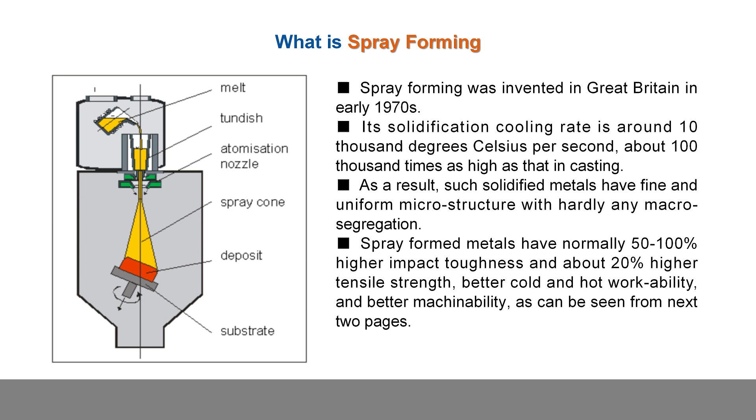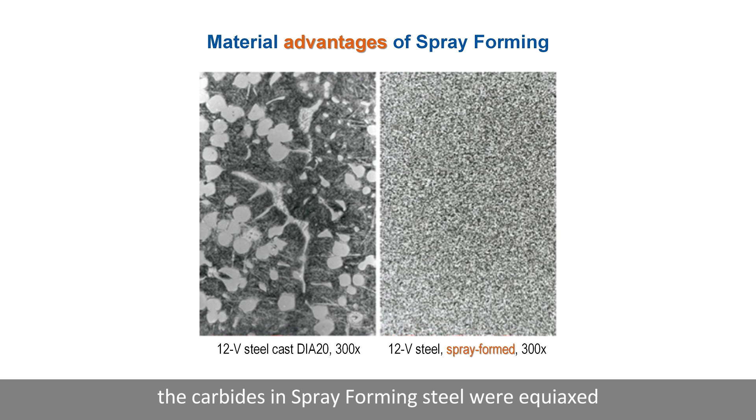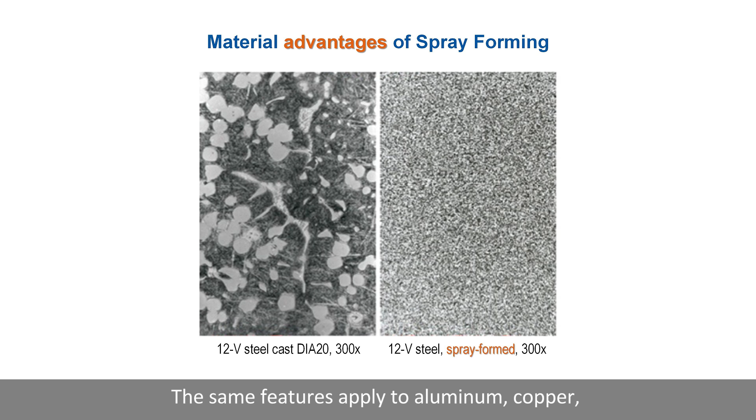As seen in the microstructure comparison, the carbides in spray-formed steel were equiaxed, about 5 micrometers, due to ultra-high-speed solidification. The same features apply to aluminum, copper, superalloys, and other alloys.

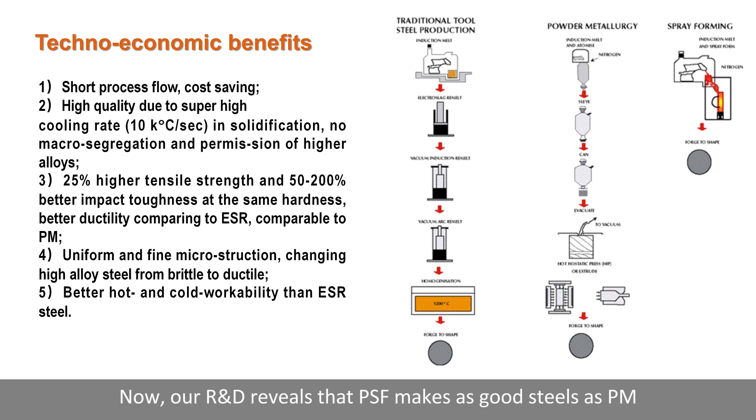This picture compares spray forming with traditional steelmaking methods—VIM, ESR, VAR—and PM, powder metallurgy, for high-performance steels. It used to be recognized that the PM process should make the best high-alloyed steel. Now, our R&D reveals that PSF makes steels as good as PM, but with a much shorter process flow and much better techno-economic benefits, while being pollution-free and energy-saving.

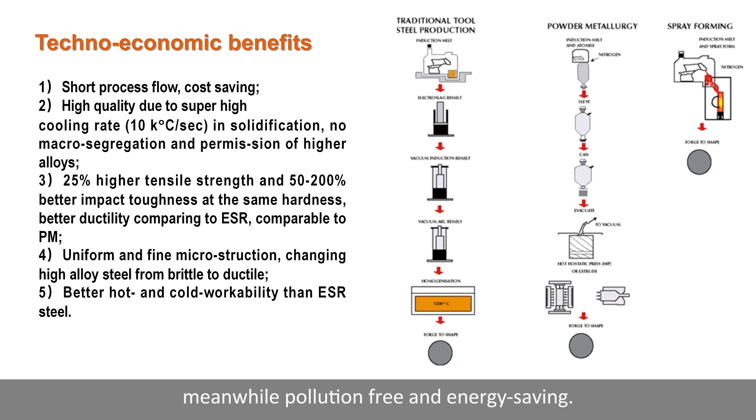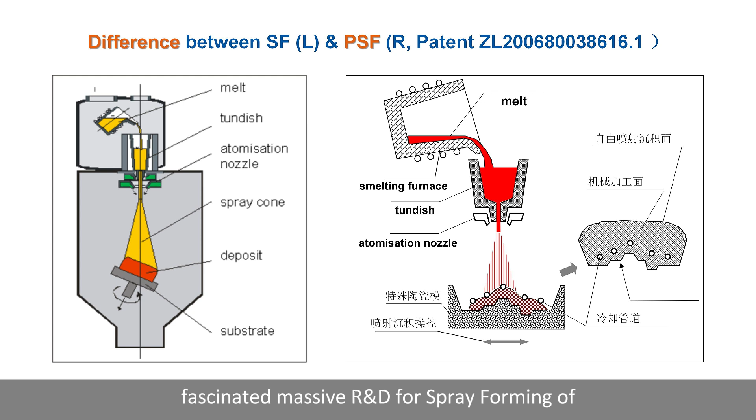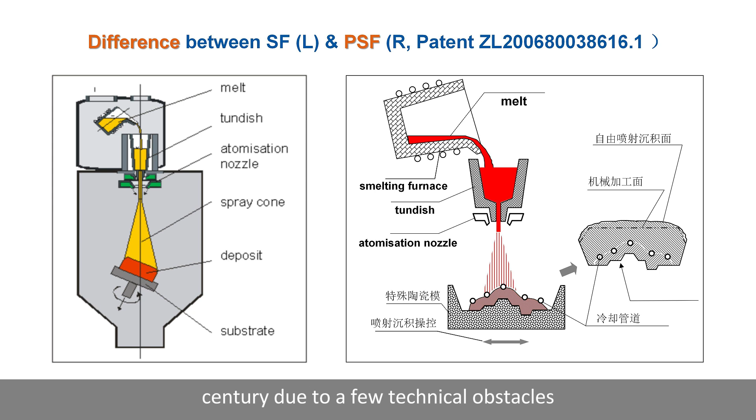Such microstructure and property advantages fascinated massive R&D for spray forming of near-net shape PSF for nearly 30 years. However, such efforts were interrupted at the end of the last century due to a few technical obstacles, such as atomization method and substrate materials. Through an R&D project from 2000 to 2003, a Chinese scientist resolved those obstacles and established the Precision Spray Forming (PSF) process.

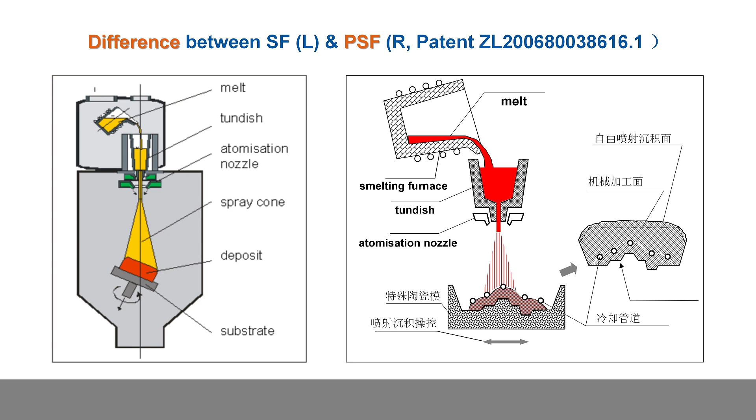The inventor of PSF technology is Yang Yunfeng, who received his metallurgy Ph.D. from Tsinghua University at the end of 1985. During his 50-year career, he worked as an engineer in the workshop, a university professor, chief research scientist in R&D institutes, and managing director in manufacturing companies.

He won China Natural Science Foundation's Youth Fund in 1988 and several national awards in R&D, for instance, Award of Innovation Finland 2009, and First Prize for Technology Progress in China's Automotive Industry. Recently, he won the Best Technical Paper Award at the 75th 2024 World Foundry Congress.

PSF technology enriched metallurgy theories and practices. Under his leadership, for the last 10 years, Fenghe has developed numerous high-end metallic materials, ferrous and non-ferrous, with advanced cost performance.

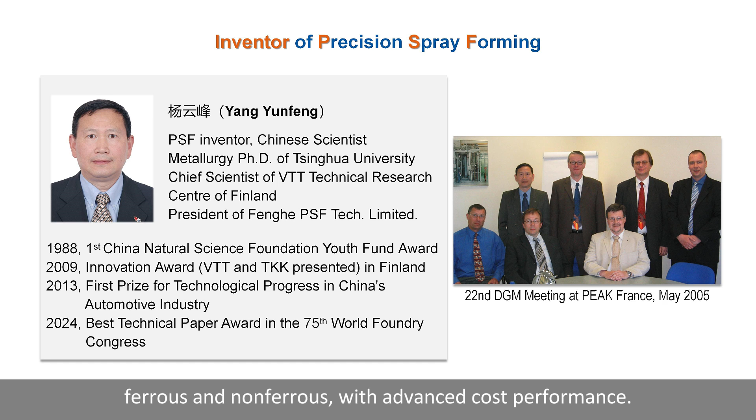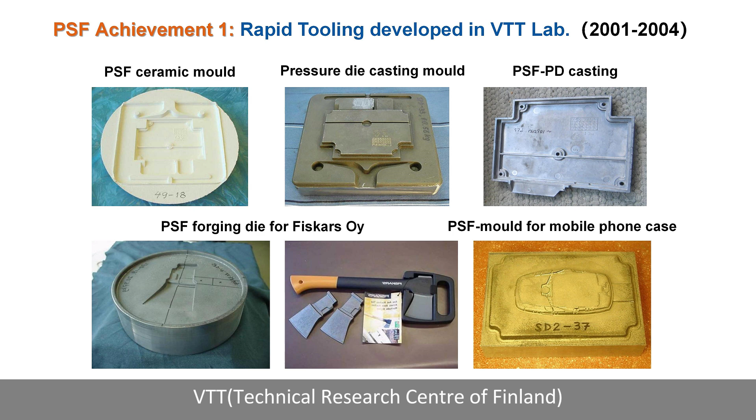At the early R&D stage of PSF in VTT, Technical Research Center of Finland, near-net shape tools included die casting molds and forging dies, etc. The PSF forging die shown in the bottom left corner had spontaneous improvement in lifetime, cost, and lead time.

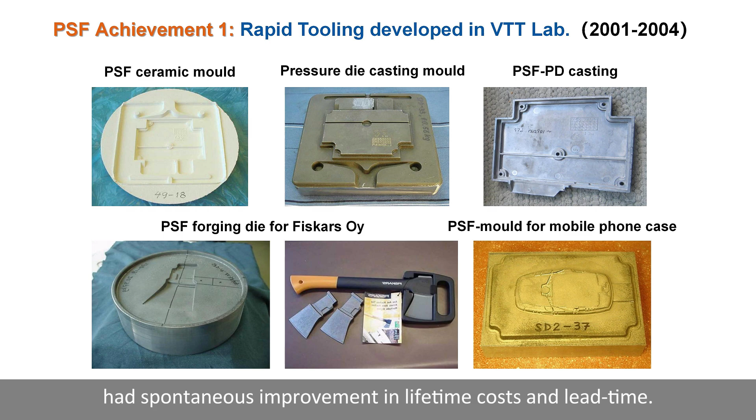Key persons from the company Osprey, the inventor of spray forming from Britain, came to VTT, Technical Research Center of Finland, to study, and were left only with surprise as to how such difficult technical obstacles were overcome.

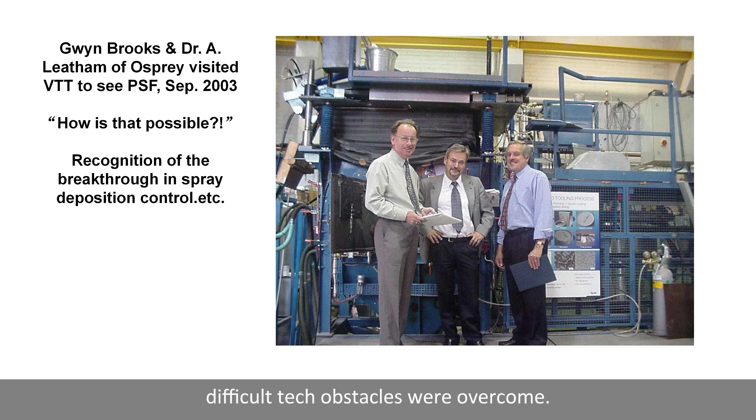Because of systematic optimization, PSF is more stable in producing special steels, especially high-alloyed steels, such as cold work steel and high-speed steel. Several PSF steel plants were built up in China, capable of making 6-ton steel ingots, which is the biggest in the world.

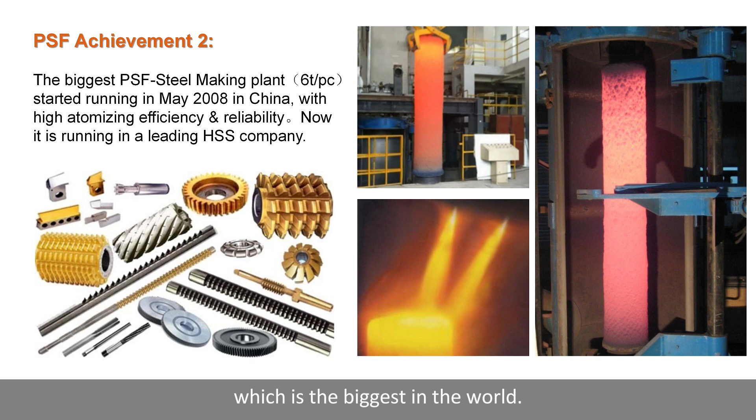Hot work steel is another tool steel used for tooling of hot forging, extrusion, and die casting, etc. Double, even quintuple lifetime was reported from our customers.

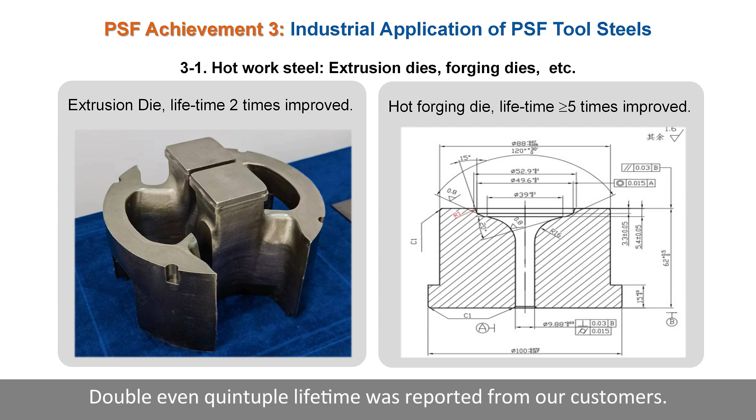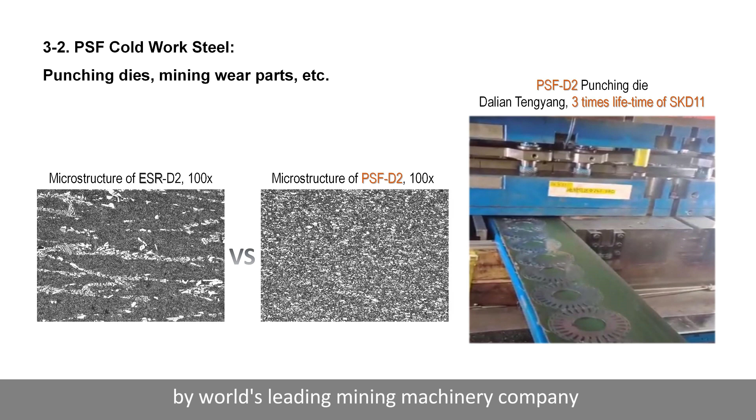PSF cold work steel has been used for wear parts by the world's leading mining machinery company for more than a decade. Another example is the punching die shown in the pictures.

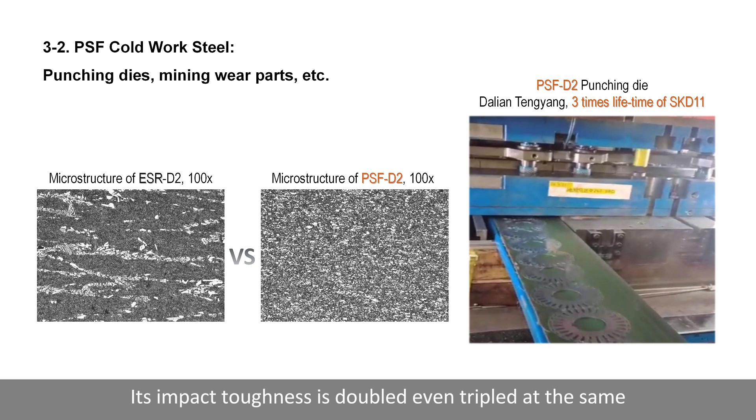PSF D2 has much better microstructure than that of ESR D2. Its impact toughness is doubled, even tripled, at the same hardness, HRC 60. Lifetime is about 3 times improved.

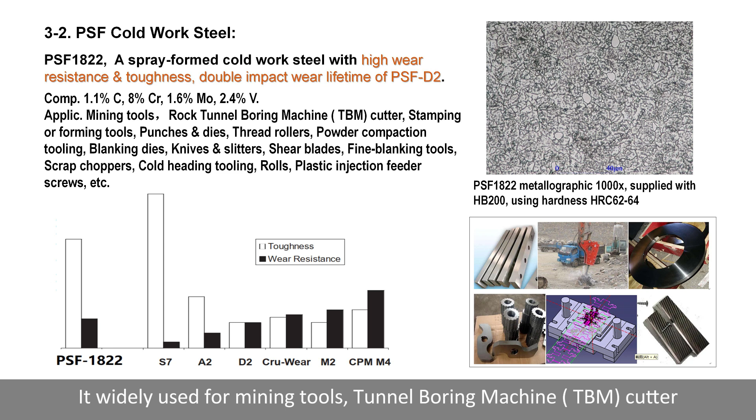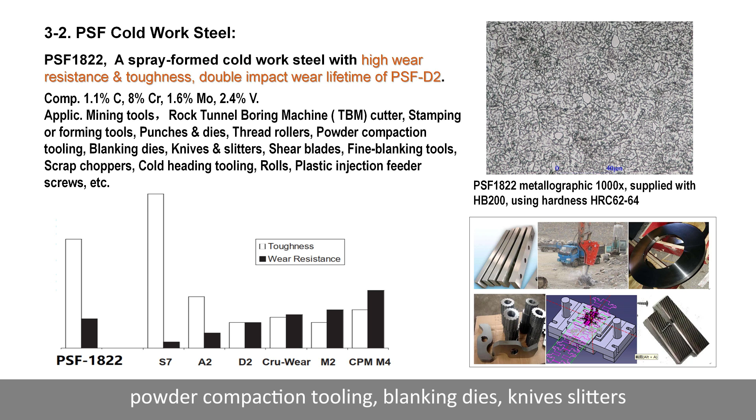PSF 1822 is a best-selling cold work steel due to its combination of high impact strength and wear resistance. It is widely used for mining tools, tunnel boring machine (TBM) cutters, stamping or forming tools, punches and dies, thread rollers, powder compaction tooling, blanking dies, knives and slitters, shear blades, fine blanking tools, scrap choppers, cold heading tooling, rolls, and plastic injection feeder screws, etc. Lifetime is improved by 2 to 5 times.

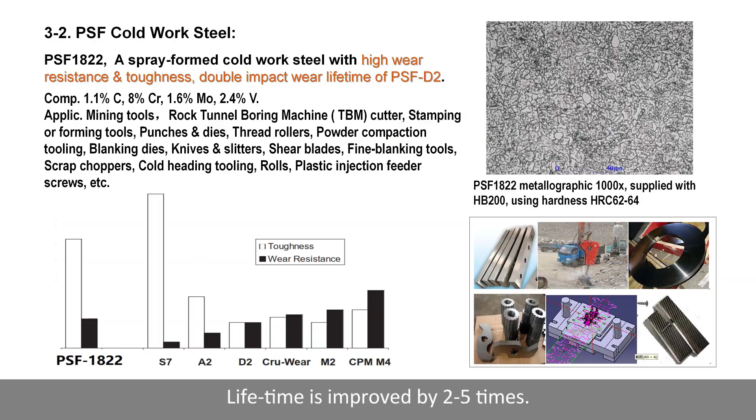As a result of the fine structures, high-speed steel, such as PSF M2, increases impact strength by 100 to 150% at the same hardness, HRC 66. Cutting tool lifetime of PSF M2 increased by 2 or 3 times over ESR M2.

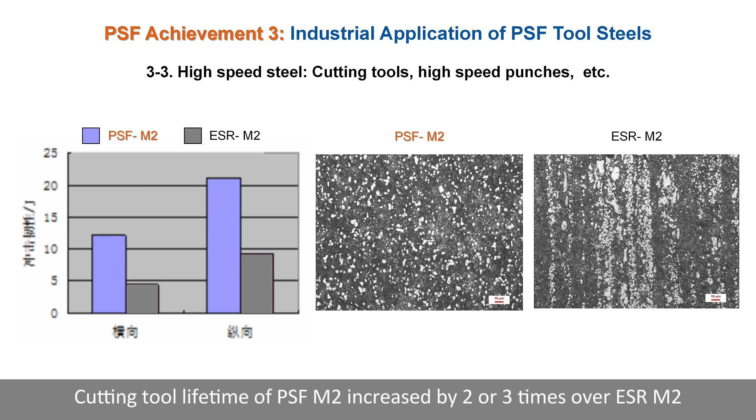Some high-speed steel applications are shown here. The lifetime of PSF M2 broaches increases to 5 times compared to ESR M2. A PSF-M3 injection rod's lifetime increased by 30% compared to PM-M3.

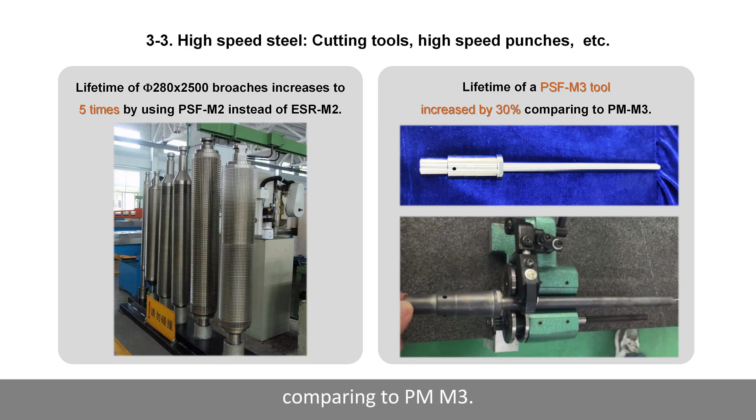These pictures make a comparison of PSF high-speed steel with PM high-speed steel. Though the difference is barely distinguishable, other structural and performance advantages are still present. Wear-resistant lifetime of PSF steel is increased by 40% over its PM counterpart.

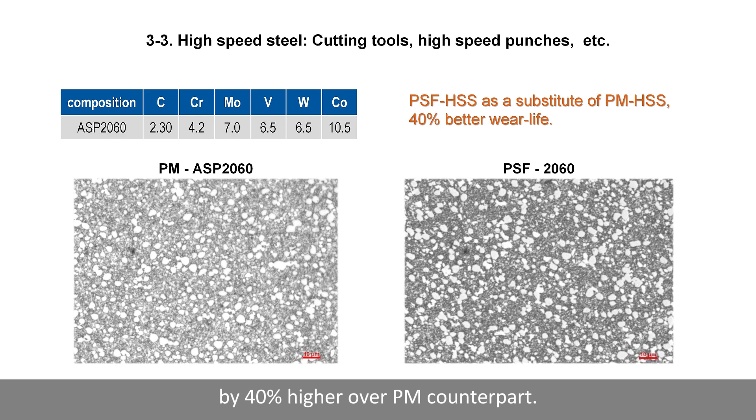Good industrial application results are also achieved with high corrosion and wear-resistant steel, with wide applications including but not limited to outdoor knives and injection rods.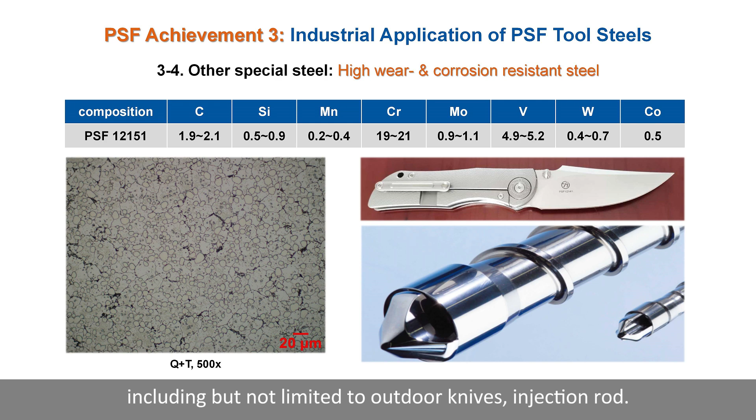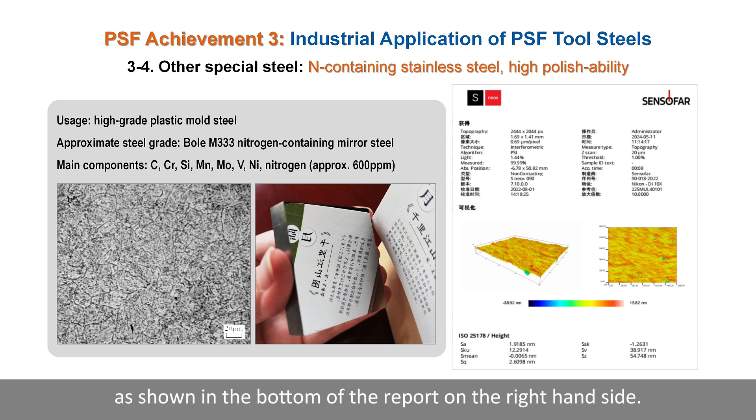Our PSF nitrogen-containing mirror steel is shown here. Its nitrogen content is approximately 600 ppm. Surface roughness is polished to about 1.92 nanometers, as shown at the bottom of the report on the right-hand side.

As discussed above, PSF steels have much better mechanical properties and tooling lifetime. PSF can also reduce material cost by spray-cladding to make bimetallic materials and tools.

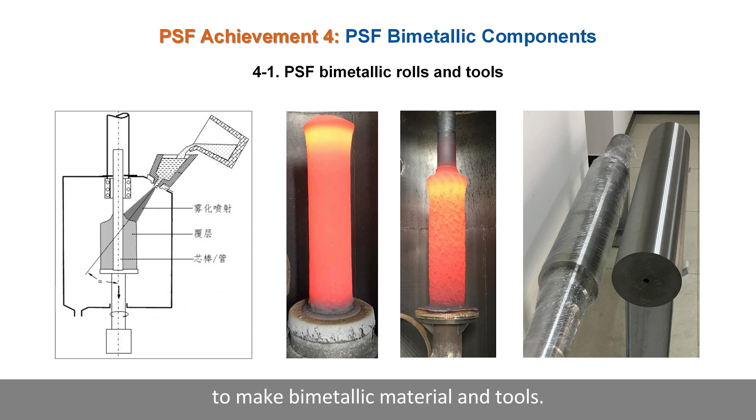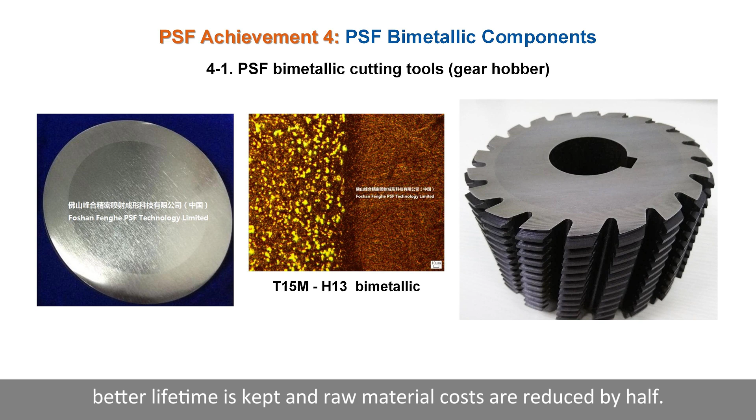This figure shows a bimetallic gear hob. Its outer part is made of PSF high-speed steel T15M and the inner part is of normal tool steel H13. The microstructure of the gear hob shows PSF T15M on the left and H13 on the right, with metallurgical bonding between the two materials. That way, better lifetime is kept and raw material costs are reduced by half.

Another PSF advantage is making hollowed billets, through which some demanding alloys, such as superalloys, can be more easily manufactured because of shorter process flow and better material yield, resulting in improved techno-economical benefits.

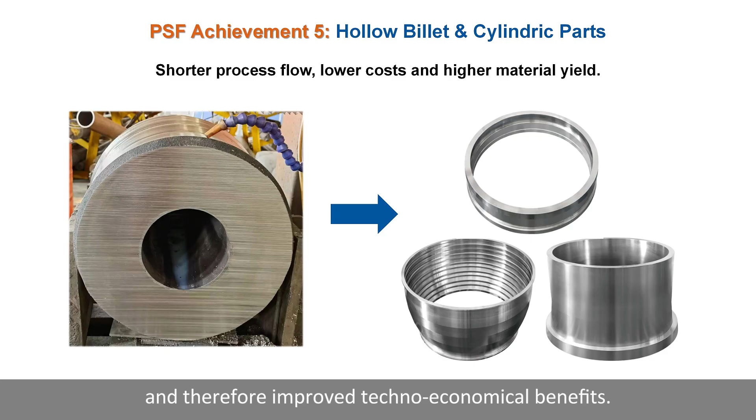A remarkable PSF progress is high-strength alloys. The microstructure of spray-formed alloy is uniform and fine, obviously better than that of cast. Mechanical properties of PSF 7A61, as an example, are better than 0.45% carbon steel, whereas its specific weight is 1/3 of steel, and its specific strength is higher than most titanium alloys.

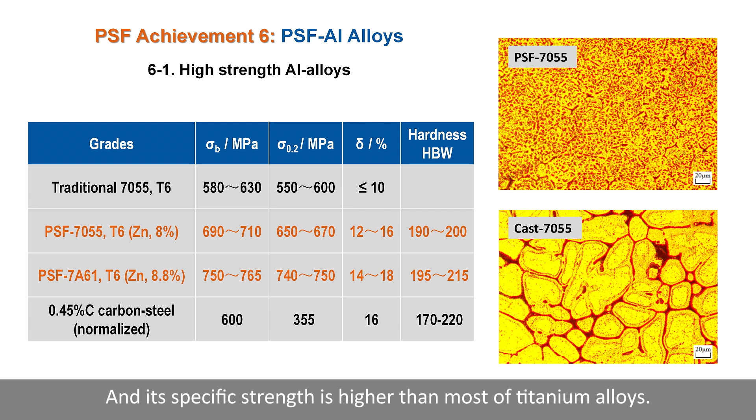High specific strength offers great potential for weight reduction of components in vehicles, electronic devices, robots, etc.

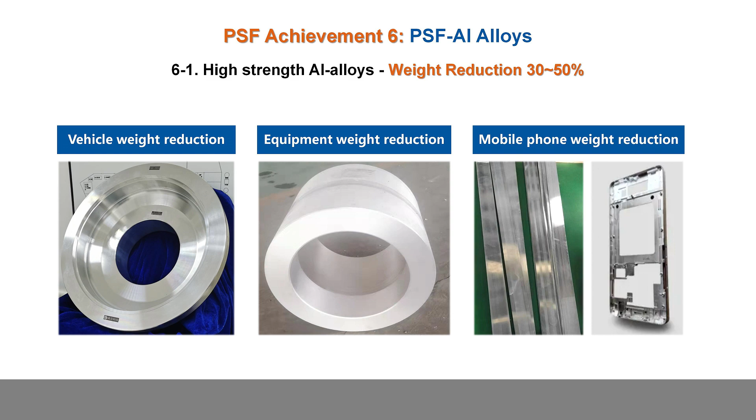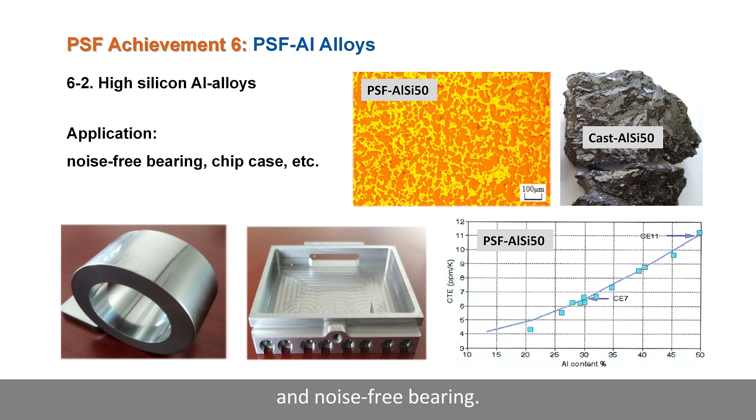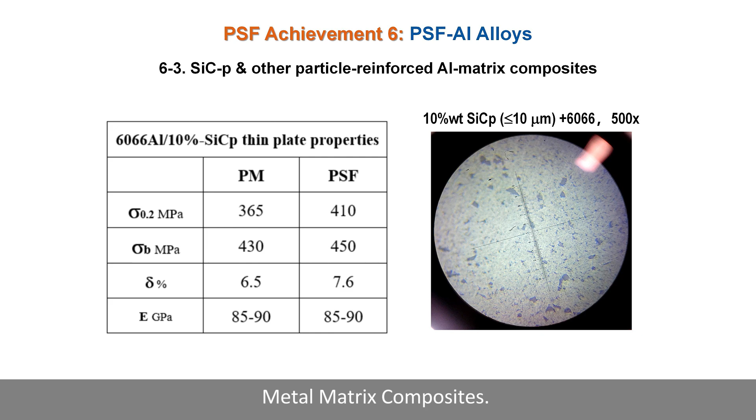PSF is an efficient way to make particle-reinforced metal matrix composites. The photo shows 10% silicon carbide particles of 10 micrometers uniformly distributed in the alloy. It is equally easy to make particle-reinforced steel or other alloys. At the same modulus of elasticity, PSF can achieve better tensile strength and yield strength than its PM counterpart.

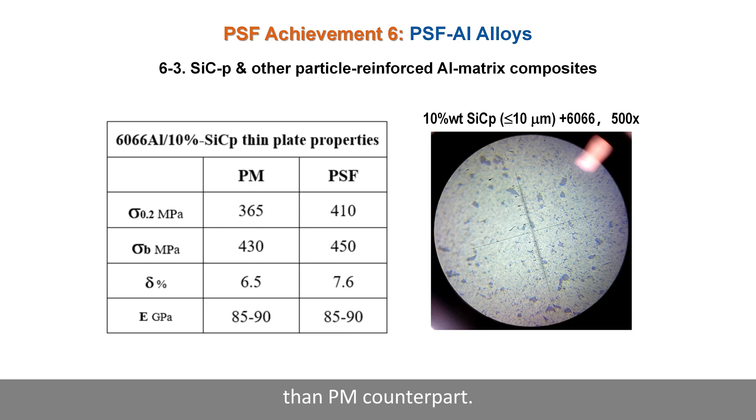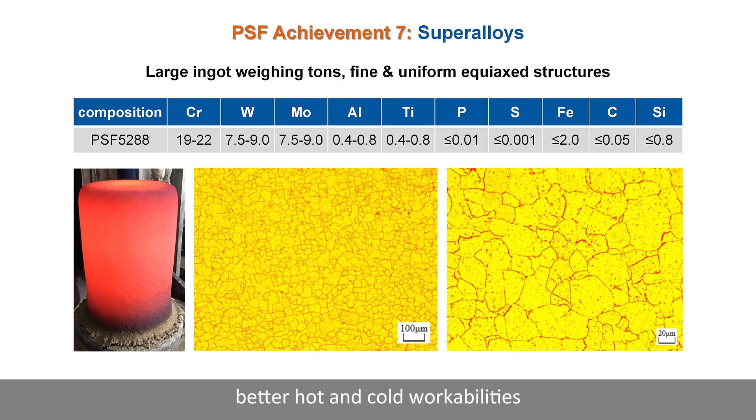PSF is also a cost-effective way to make superalloys. The uniform and fine microstructures result in better hot and cold workabilities, reliable strength, and higher material yield.

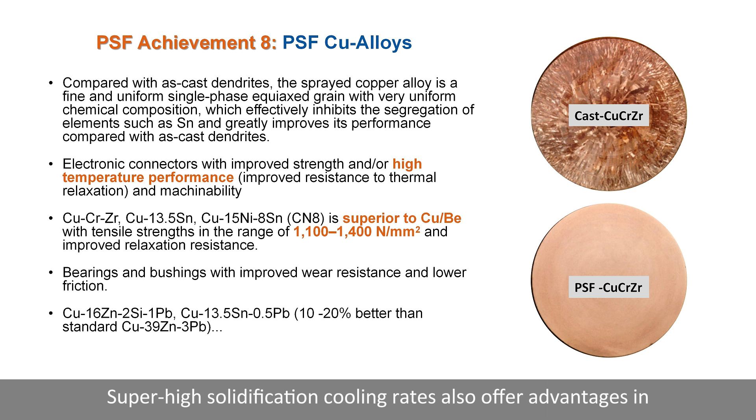Super high solidification cooling rates also offer advantages in making high-end copper alloys, as listed in this slide. Compared with as-cast dendrites, the sprayed copper alloy is a fine and uniform single-phase equiaxed grain with very uniform chemical composition, which effectively inhibits the segregation of elements such as tin, greatly improving its performance compared with as-cast dendrites.

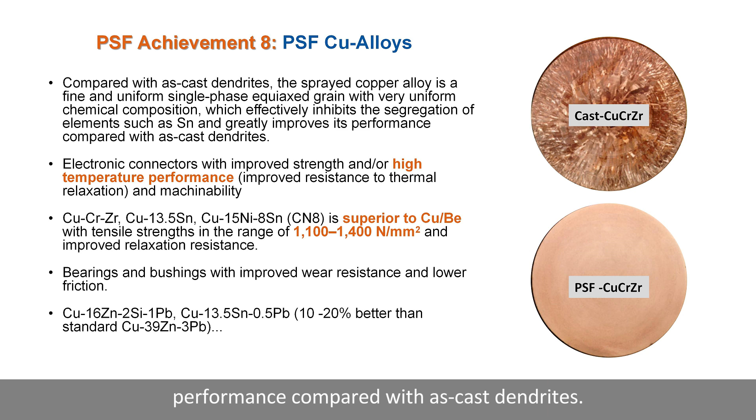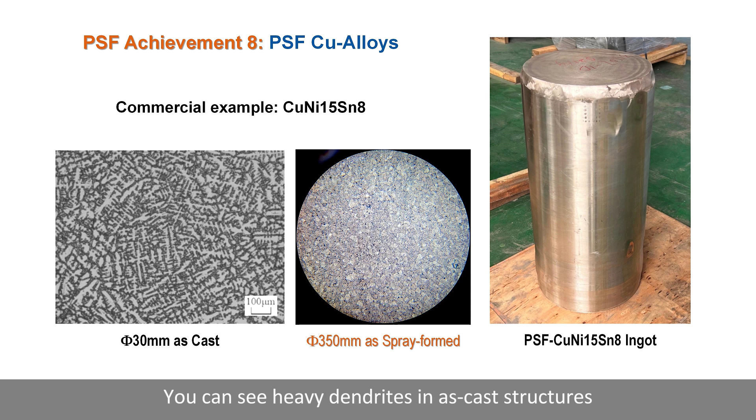An example of high-performance copper alloy is CuNi15Sn8. You can see heavy dendrites in as-cast structures, whereas the PSF alloy is fine and uniform, with best alloying efficiency. The strength can reach 1,200 megapascals.

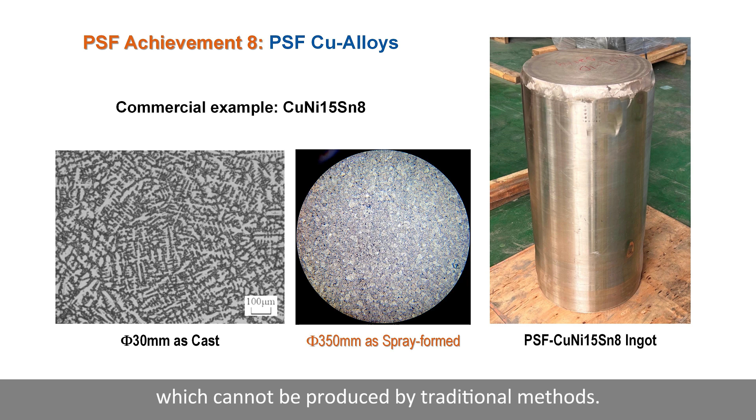There are also some high value-added materials that we can now mass produce, which cannot be produced by traditional methods. This is a production line with a capacity of 10,000 tons per year, with single ingots weighing 6 tons. Fenghe makes the turnkey project from design, manufacturing, installation, debugging, and running services.

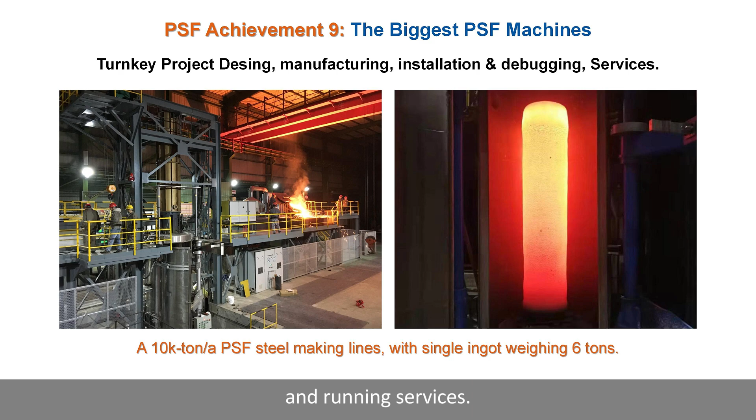PSF technology has significant industry influence worldwide. The inventor of PSF, Yang Yingfeng, was invited to attend the 75th World Foundry Congress to give a presentation and received the Best Technical Paper Award.

PSF technology also has great significance for the country. Former national leaders, such as Li Keqiang and Hu Chunhua, have thought highly of PSF, and central and local governments have always provided great support for the development of this technology.

At last, let's give a summary of the PSF introduction. Firstly, super rapid solidification and short process flow make PSF technology flexible and cost-efficient in making high-performance alloys, with fine and uniform microstructure and outstanding properties.

Secondly, in many high-end applications, PSF simultaneously achieves multiple improvements of the material or components in properties or lifetime, costs, and lead time.

Finally, Fenghe has the complete IPR of PSF technology, as well as capabilities in material and process R&D, and in building up full sets of PSF production lines, aiming to serve high-performance metallic requirements in the world.